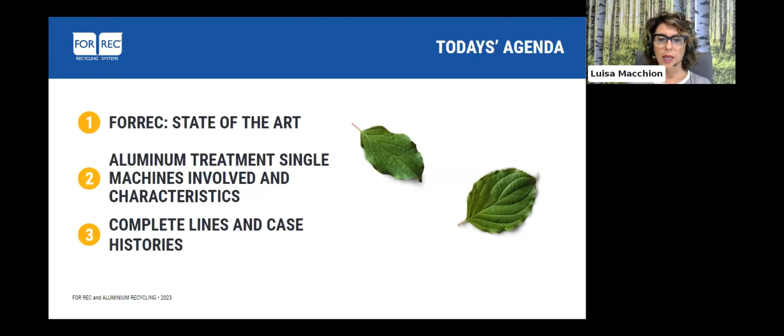Thanks, Emanuele. Today we will talk about recycling and about Forrec, a company closely linked to this word. We will present our range of products, our main applications, and we will focus on aluminum recycling, which is the reason for your presence here today. Our webinar will end with some case histories of successful projects and companies dealing with this kind of waste.

Before going through the technical part of the presentation, I'd like to share some information about our company for those not familiar with our production. In short, we are designers and manufacturers of shredders and customized turnkey systems for waste recycling. We are a company absolutely customer oriented, paying great attention to after-sales service, and all our installations and machines are as unique as DNA strands.

This means we work and match our skills with the knowledge of the customer in order to create a tailor-made project, with the goal of realizing the perfect system to solve the recycling issues that our customers have.

So who is Forrec and what is our identity? I'd like to focus on a couple of letters, R and E, to explain our identity. RE as recycling, that is our core business and our mission: Forrec was born with the ambitious purpose to give new life to everyday produced scraps with the aim to preserve the environment. RE as relationship, because we are absolutely sure that a great project is the result of a great relationship between supplier and customer.

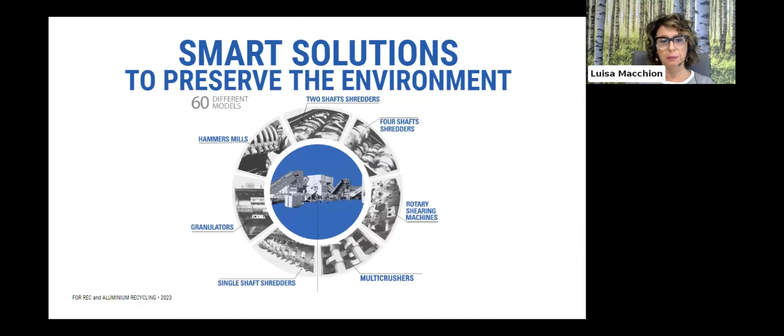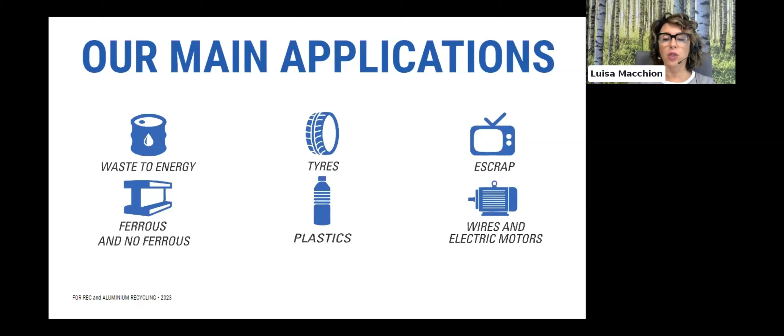So let's start with the aluminum treatment and the single machines involved in this process and their characteristics.

Over the years, we are witnessing strong growth in objects produced from aluminum. This trend is mainly driven by the fact that aluminum not only can be used in countless sectors, but can also be 100% recycled unlimited times. This contributes to a reduction of CO2 in the atmosphere and avoids the extraction and production of new materials, reducing the company's environmental impact.

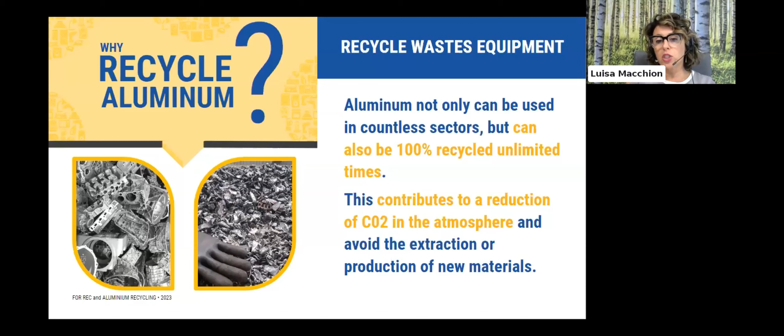Moreover, considering the increasing focus on material recycling and aluminum recovery, it's easy to imagine that interest towards aluminum will grow in importance in the future. Now the question is, how can Forrec help you make a great business with aluminum recycling?

From the point of view of cost and environmental impact, this is a real business because recycling aluminum saves 95% of the energy required to recover aluminum as a raw material. What we do at Forrec is design and manufacture tailor-made projects shaped on customers' needs. Considering the price of aluminum is constantly increasing, investing in machines for recycling could be very profitable.

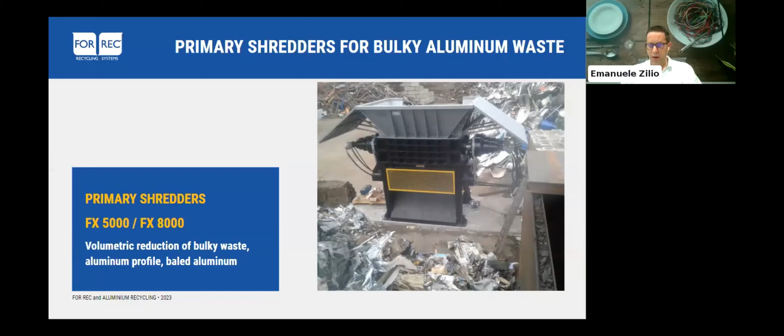Forrec manufactures this pre-shredder in two versions: the FX 5000, which has 360 kW installed and is a hydraulic machine, or the FX 8000, which can achieve 440 or even 800 kW. The difference in power also means a difference in cutting chamber. Based on scrap density and shredder size, we can achieve approximately 10 to 20 tons per hour.

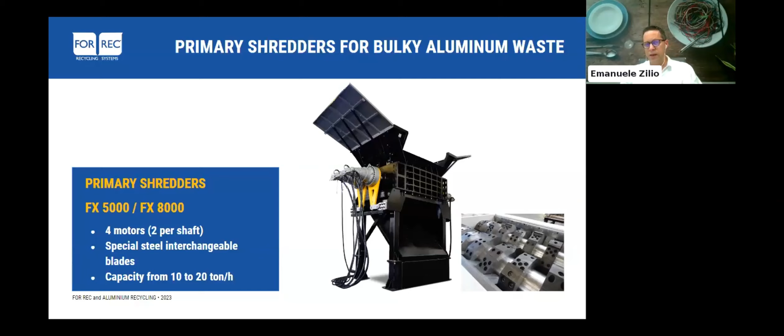I would say the FX pre-shredder is a key machine to put all scrap in a safe condition before introducing the pre-shredded scrap into the hammer mill, because we erase dangerous moments the hammer mill can have, like gas tanks that are still unshredded. By passing the scrap into the pre-shredding stage, we can definitely put all the scrap in a safe condition.

The other shredder we use in the aluminum recycling business is a hydraulic single shaft shredder, what I like to call the one-step shredder. In that machine, we achieve something like 5 to 10 tons per hour in one step, starting with bulky soft aluminum.

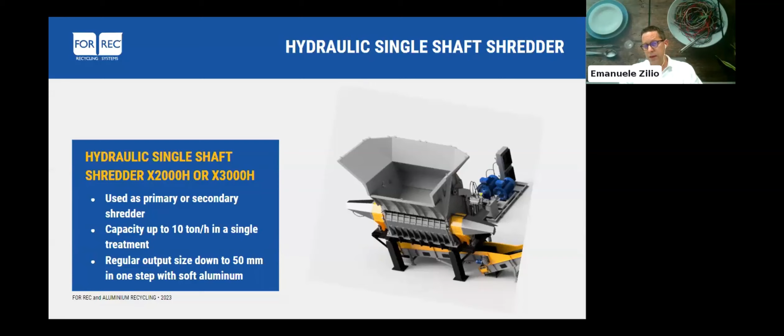Generally speaking, we are discussing the 5000 or 6000 series in terms of aluminum profile. In one step, we achieve an output size between 80 and 100 millimeters with very good capacity. Running costs are extremely low thanks to a multiple-times usable knife. I would say that in this last period, this is one of the best-selling shredders FOR REC has sold and successfully placed, especially in the soft aluminum recycling business.

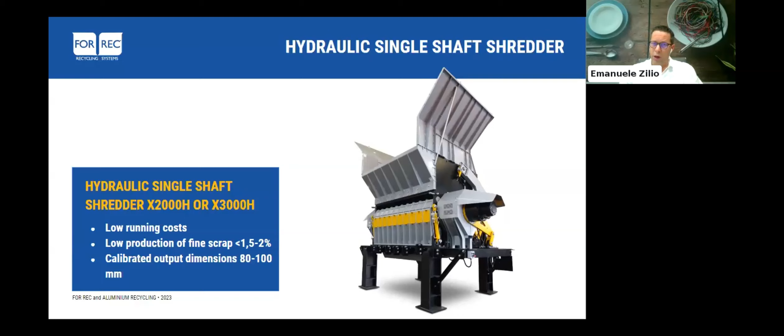As you can see from the slide, we typically offer the X2000H or the X3000H, meaning a hydraulic single shaft shredder with a 2000 millimeter rotor length or 3000 millimeter rotor length. The rotor diameter is approximately 750. We use bolted and replaceable knives that are 105 by 105 millimeters with a thickness of 50 millimeters. The use of this shredder in the soft aluminum recycling world is very appreciated because the fines in the output product are very low, approximately 1.5-2%, and as you know, fines typically represent a loss of product.

As you can see in this detailed picture, first of all, the rotor is fully covered by hard welding, ensuring a long lifetime. All the tooling is screwed, not welded, so in case of a break, the customer can easily substitute not only the blade but even the blade holder. The sieve is modular, composed of approximately 10 or 6 modules, so in case you break one, you can substitute only that one and not the whole set.

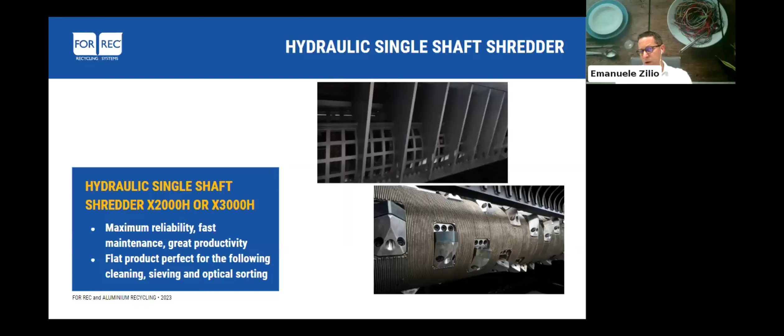Now let's focus on the refining stage for aluminum, which is the hammer mills. This is a compact solution for aluminum scrap facilities with heavier contamination, especially cast aluminum. We propose this hammer mill mainly in 3 versions, but I want to focus on the Z15 and Z16, which according to my experience is the sweet hammer mill size, because the range here is from 250 to 455 kilowatts.

One of the big advantages of these hammer mills is the double crushing handles. So don't focus so much on the cutting room size, but focus on the advantages we have installed.

These double crushing handles help productivity, notwithstanding the rotor is not so huge. Especially the concept of the hammers passing quite close to the sieve helps in squeezing out and liberating all the contaminants, the steel contaminants or other contaminants, especially on the cast aluminum or even the soft aluminum.

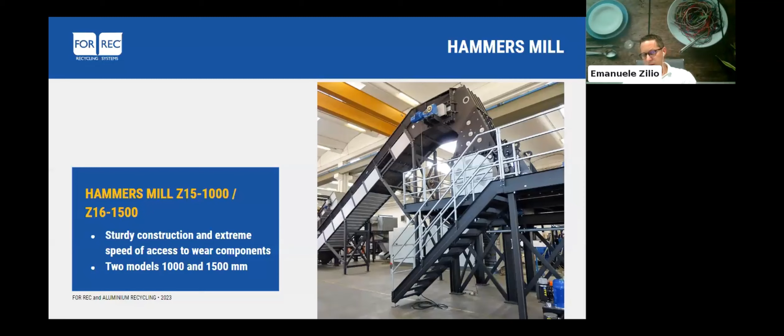So as I said, we mainly propose the Z15 and the Z16, where the difference is mainly on the rotor length and diameter and the installed power. We pass from 250 up to 455, and the rotor is from 1000 up to 1500 millimeter length, with a different diameter of course. The capacity, we can say, is between 10 and 13 tons per hour, depending on the scrap density and on the sieve size.

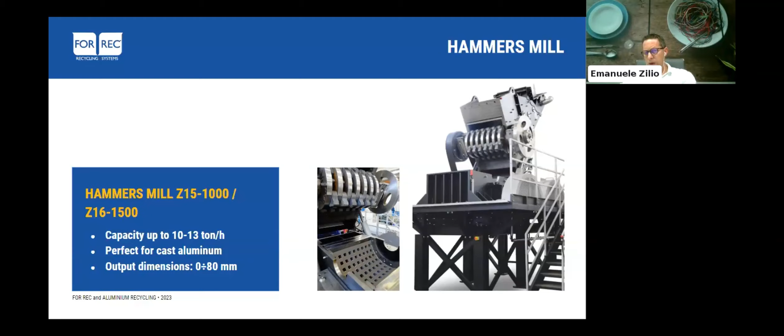As much as you decrease the sieve, as much you create fine material, and the capacity of course will decrease accordingly. But generally speaking, the data I'm providing today considers a sieve size of 80 millimeters, and the capacity is almost guaranteed.

FOR REC has, even in this recent period, installed and commissioned different aluminum recycling lines. The last one, highly represented in this slide, is composed of the single shaft shredder, hydraulic driven, with sieving of the material, with the ironing stage, with the classifier, with an eddy current separator in order to separate the aluminum fraction or non-ferrous fraction from plastic, wood, and garbage.

And then at the end, even with the optical separator, able to read the different alloy of the aluminum and achieve one of the best results for the foundry, which is to have a high aluminum quality, getting rid of steel, plastic, and other alloy. This line is working, producing something like between 8 and 10 tons per hour of soft aluminum scrap.

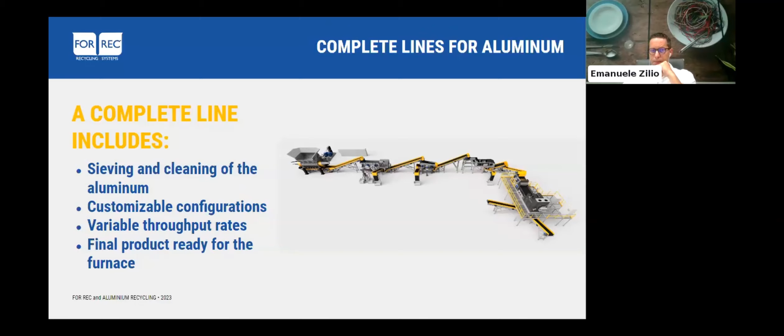Let's now introduce some case histories on aluminum recycling. Today's agenda will show you mainly 3 case histories with different concept and different material.

The first video will show you the single shaft shredder X3000, hydraulic driven, shredding soft aluminum profiles 6000 and 5000 series in one step down to 50 millimeters and producing something like 6 tons an hour. You will see the machine in operation, the output, and this compact line that the customer wanted in his furnaces.

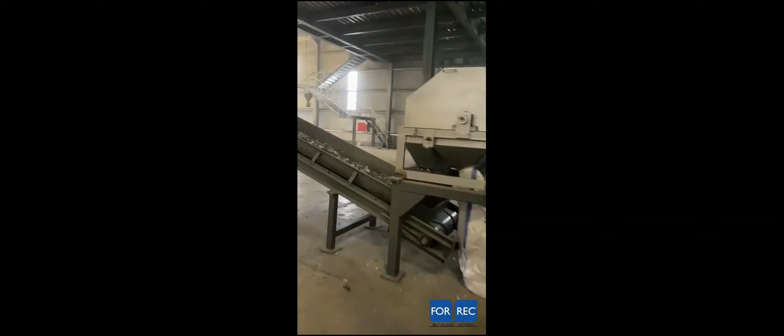In this next video, you will see always the single shaft hydraulic driven 3000, but a different line concept, much more complex, because in this case the aim of the customer was to achieve the highest purity of the aluminum scrap. So, as I said before, you will see the scrap shredded, ironed, sieved in size, and then cleaned away from plastic and other alloy.

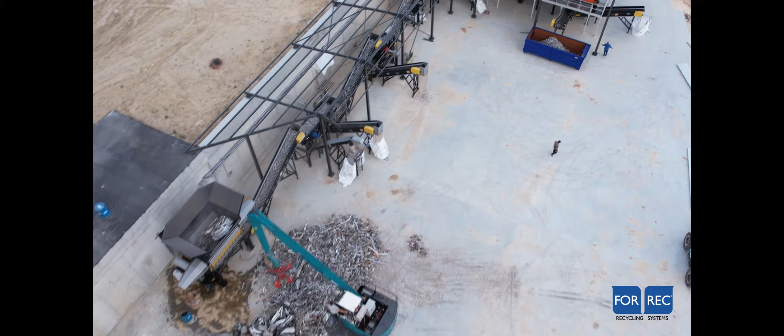In this next video, you will see a completely different application. We are discussing the hammer mill and the cast aluminum. In this case, the cast aluminum was previously pre-shredded by an FX, and the aim of the customer was to get rid of small contaminants. In this case it was steel contaminants, and you will see the fraction very small, but absolutely very clean.

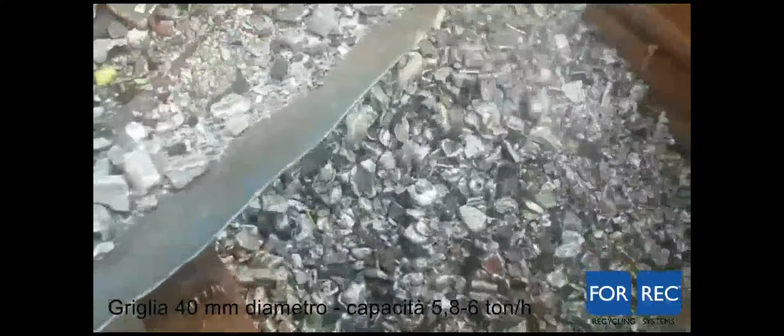Thanks Emanuele, thanks also for these case histories, which perfectly show how the systems work. And also they are a good case history for customers interested in such a system.

I shall conclude this brief presentation by talking about a side of Forrec which is a peculiar plus: the after-sales service. Thanks to our spare parts warehouse of 2,000 square meters and our support team, either remotely or directly at the customer's production site, we are able to support any special maintenance in a timely and effective manner. The focus you have to aspire to for good business with aluminum is to have a solid line complete with no downtime and with low production cost.